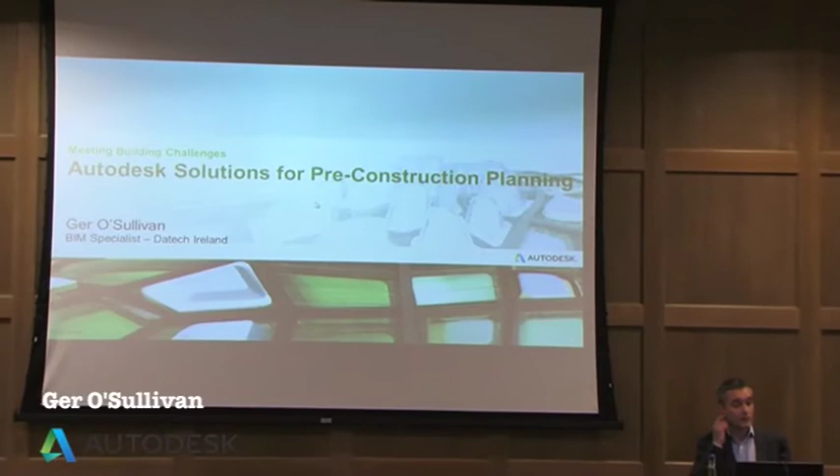So in keeping with the title of the event, we're going to have a look at some Autodesk solutions for pre-construction planning. I think you'll all agree that projects are getting more complex, and as we enter the BIM era, we now have access to more data than ever before. So what we're trying to think about is how we manage that data and use it to ensure we're successful in our project outcomes. I'm only going to concentrate on one product today, and that will be Autodesk Navisworks Manage.

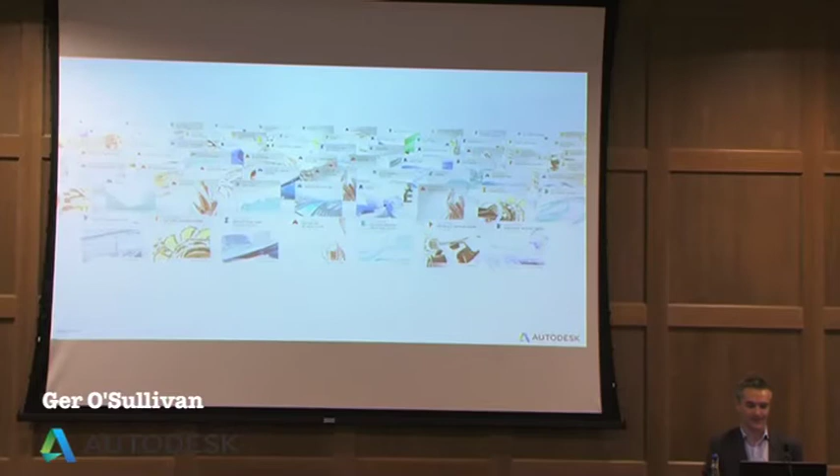So we've heard about interoperability, I was going to bring it up anyway, it was asked as a question. We've heard about our fantastic suite of products. This is just a selection, but we have plant, civil, obviously Revit for architecture, structure, and MEP, and we need these to talk to each other, to be able to collaborate. There's obviously a lot of third-party software out there too, and that's just the way the construction industry is.

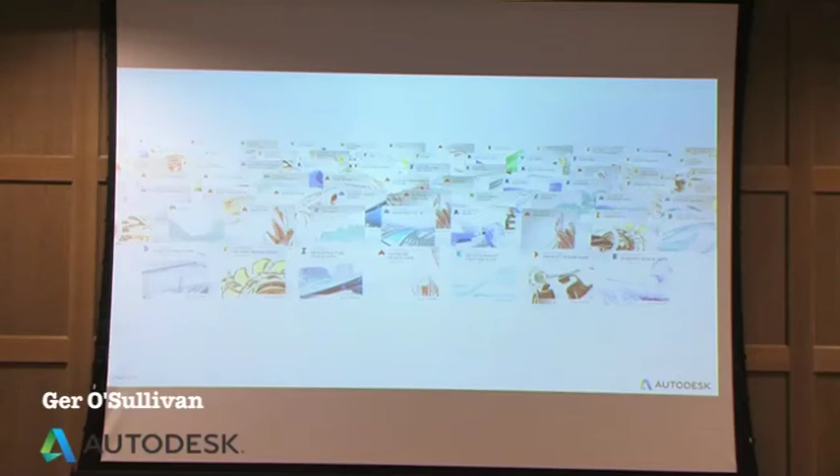So the challenge for any management tool is that it can start to aggregate and work with this information. I think that's the power of Navisworks, that it has more than 40 different design file formats it can use natively. On top of that we have IFC, which we've heard about as a collaboration format, and then we've got laser scans like point clouds, which has become very popular. The engine that manages those has improved by about 10 times in the last year, so that's a huge benefit.

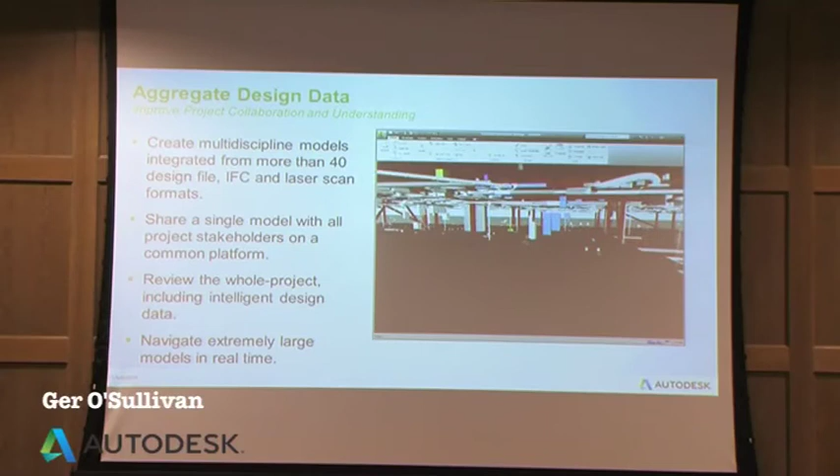So what you're seeing here while I'm talking is the video. We're basically aggregating all the file formats together into a single model, which can then be shared. We can share it via the desktop interface, the Manage software, or via a free viewer as well, so we can give that to all stakeholders.

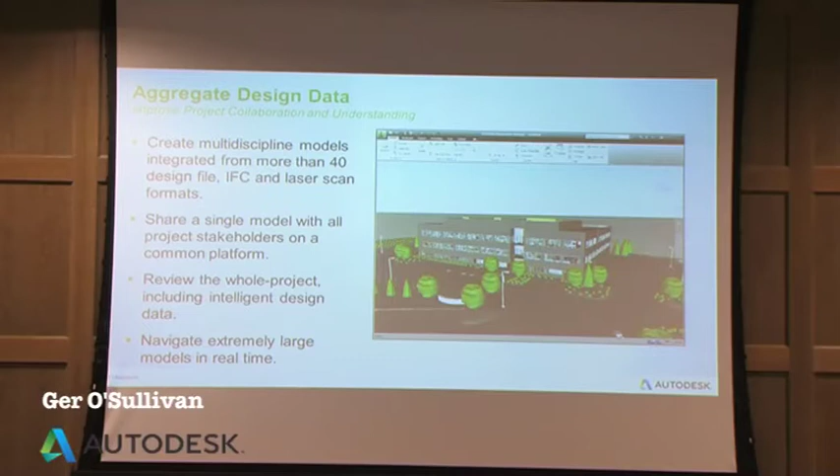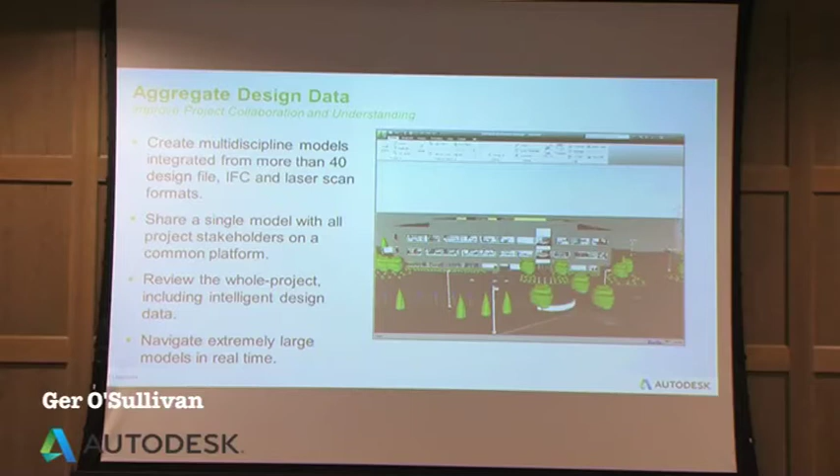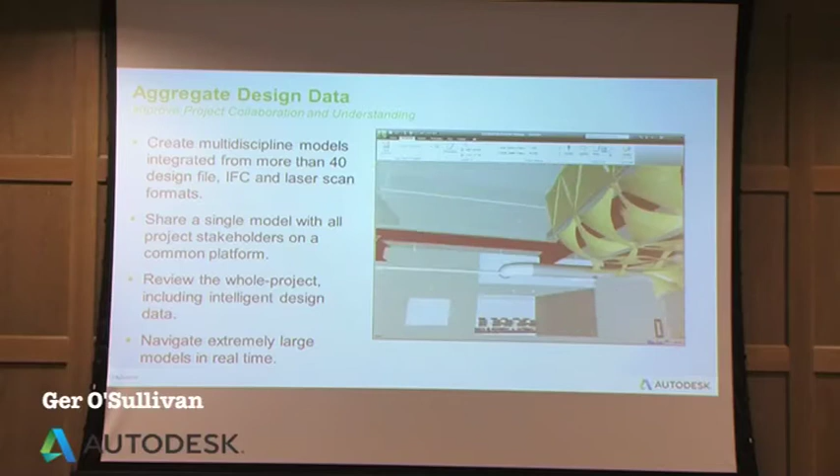It's quite good as well at navigating extremely large data sets. We talked about the amount of data we now have access to, so we obviously have an overhead there. Navisworks can cache the files, and then when it comes to navigating and reviewing in real time, it's a pretty streamlined process. Hopefully you just get a flavour of what it can do when it comes to getting in the information.

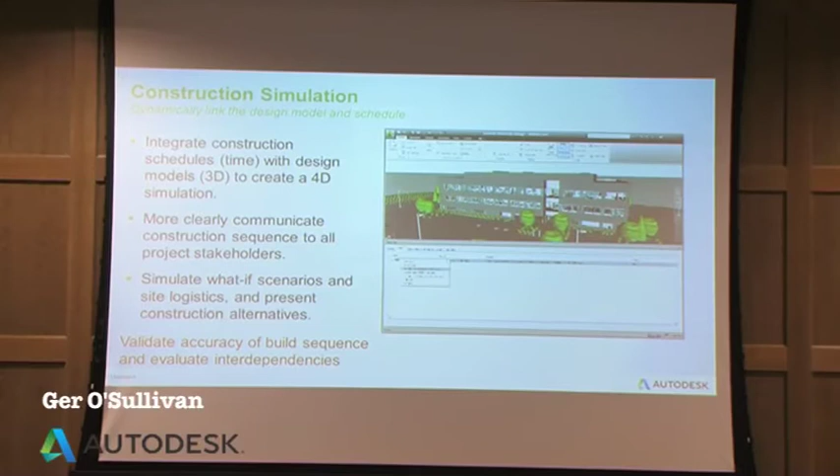We link in the actual CSV file, or it could be an MPP, and we get the same output within Navisworks itself. I know the video quality isn't brilliant, but hopefully you'll make out what the actual timeline is. We've got the actual start and end, and we can compare the two, so we can start to simulate what we're trying to achieve.

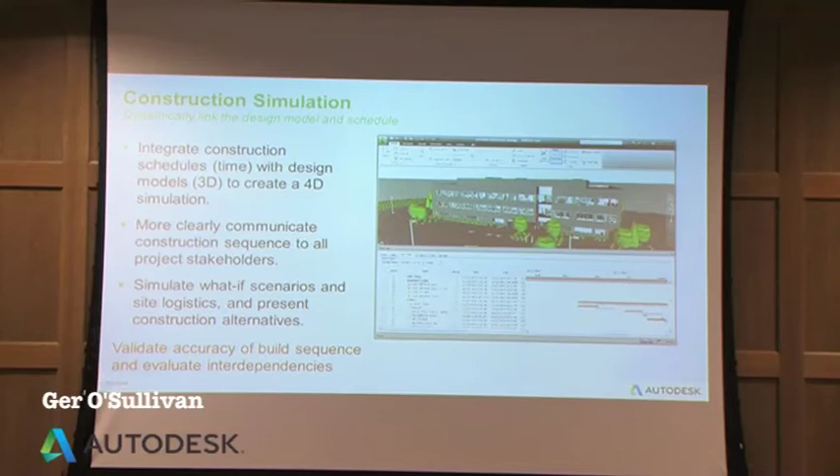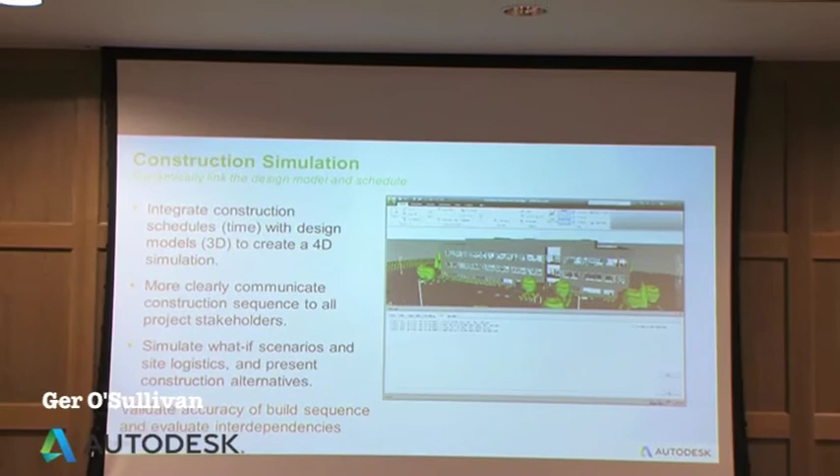There's also the option to play around with the dates inside Navis, so we can do what-if scenarios. We can then quickly add in some rules where we apply existing geometry to the actual timeline, and then simulate it. There's no animation going on in the background, we just begin to see the construction sequence via the dates. We can start to color code it, so if something is late we see it in a different color, or if on time we see it in the correct sequence. Hopefully that gives you a flavor of the power of the 4D sequencing.

But let's take it maybe just beyond the building, okay? We'll just fast forward onto the next video. This is again maybe slightly like the Laing O'Rourke video where they used it as a presentation tool. We might look at it as a presentation tool where we look at the whole site. We start to model the hoarding.

We start to model the site clearance - containers, site huts, stuff we normally don't put into the building model. It's still important to know what time it's going to be on site and where it'll be positioned. You can look at pouring of slabs, where trucks need to park, adding your crane in, where the boom goes, so we can see if it interferes with any neighbouring buildings. Adding clash detection into this is quite important too.

Maybe just modelling the scaffolding - we normally don't tend to do that, but it's important. Where do we store the scaffolding? How can we minimise the amount of scaffolding we need at any one time? Quite useful within the simulation.

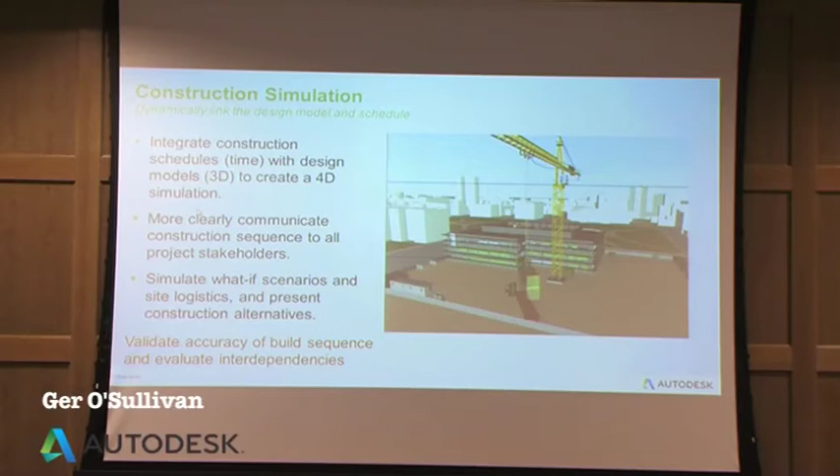And then just maybe equipment, bringing equipment on site. Where does the crane have to be? Where does the lorry have to park? And how do we lift it in so we don't clash with any of the other parts of the building? So that's a little bit extra.

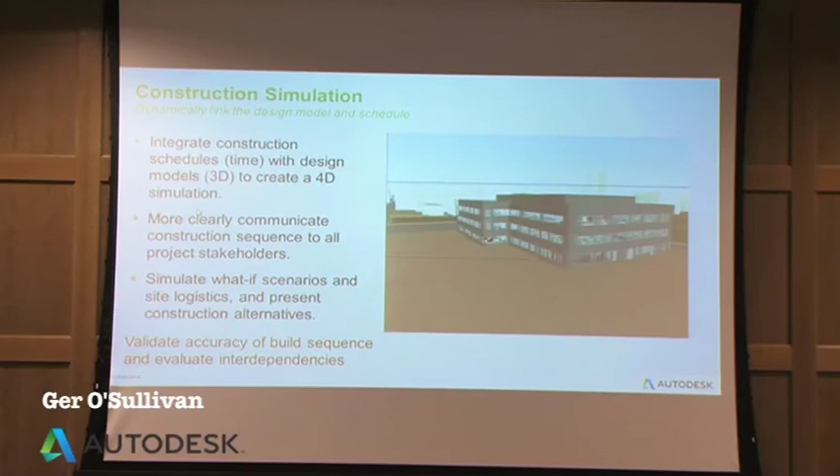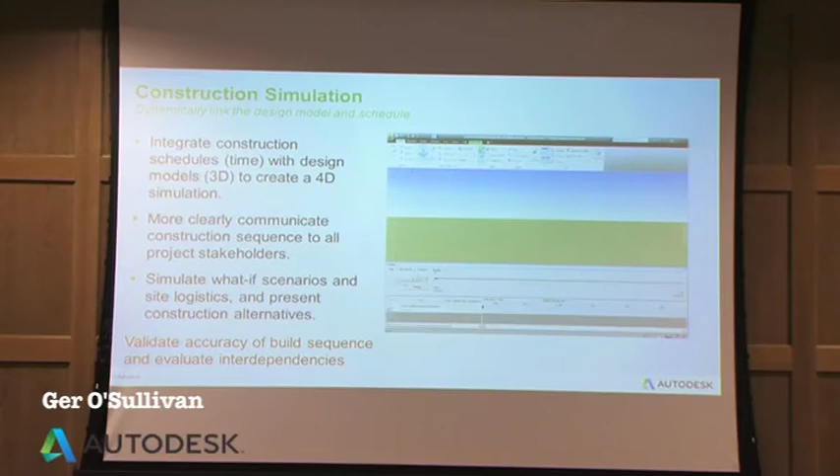If we take it a step further, you might use the simulation - we call it planning - to show how you construct a part of the building. So I've taken a wall panel and we get it to go, start it off. We've done something similar, actually using Revit to break up the wall using construction parts, and then I've added generic timelines, so we can show somebody on site how we put this part of the building together.

It's a very simple example - there's obviously more complex areas. But how does the cladding go on? Even the sequence - do we put in the windows before we put on the cladding? Maybe I should have, but we can decide and change that if it's a better way to construct it. When does the curtain walling pop in? When do we add glass in? What time does that have to be on site so we can get ready for it?

And then we can look at the interior. We can start to look at the plasterboard and how that gets sequenced. So again, beyond just the normal simulations, let's use it with a little bit more intelligence.

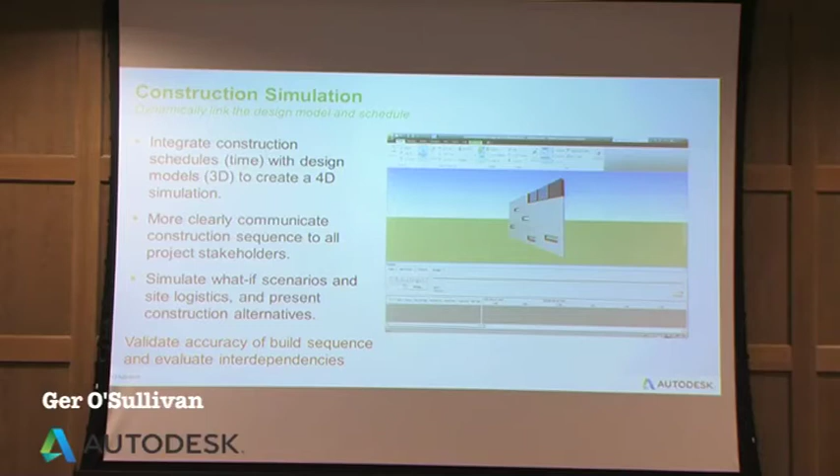Okay, let's have a quick look at clash detection then. See clash detection as planning what you're not going to do, as opposed to planning what you're going to do. So I'm not going to run that duct at 300 mil below the ceiling because there's a 400 mil beam just 20 meters down the road. Just think of it that way.

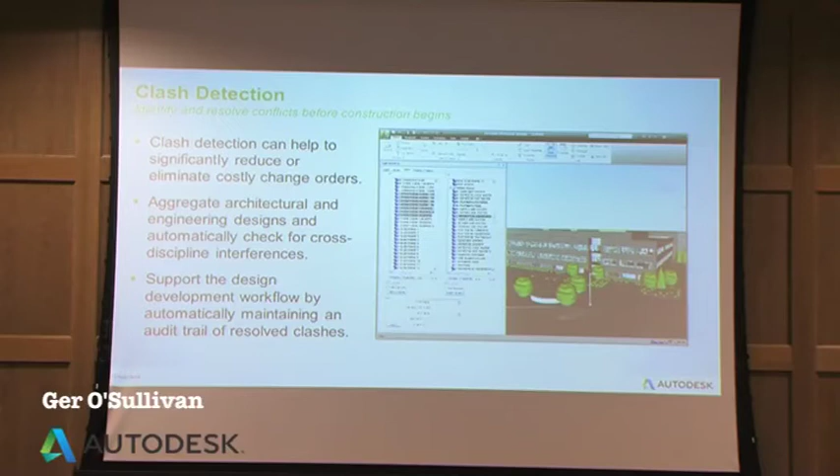In this case, you're seeing the clash happening. You're not seeing the background as to the grouping of the objects. We don't tend to clash everything - it creates a bit of a mess. We do it intelligently - we clash maybe first floor structure with first floor MEP, something like that.

We can then start to go through the clashes and add comments. Again, this is all about sharing the information down the line. We can review the clash so we can see it reviewed - there may be the same clash, but maybe it's clashing with another element in the building as well.

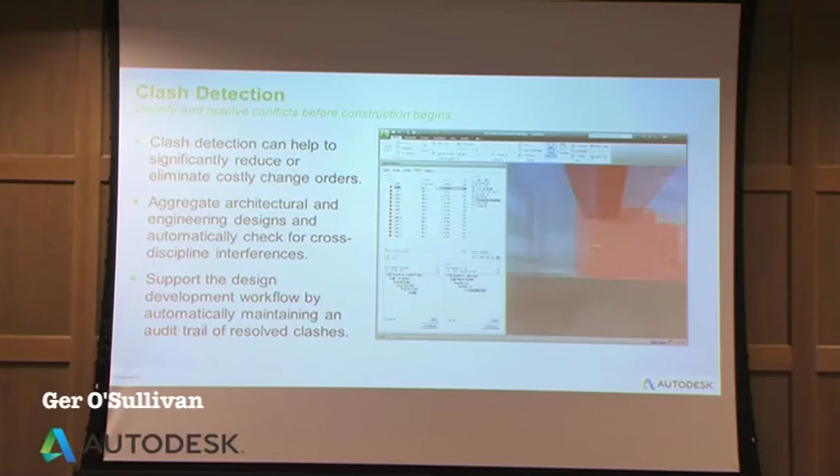In this case, I'm using transparent views, so we're not actually seeing the full extent - there's actually a problem with one of the walls as well. So in this case, the M&E loses out - I think that's probably normal. And we'll just add in some comments about moving the equipment.

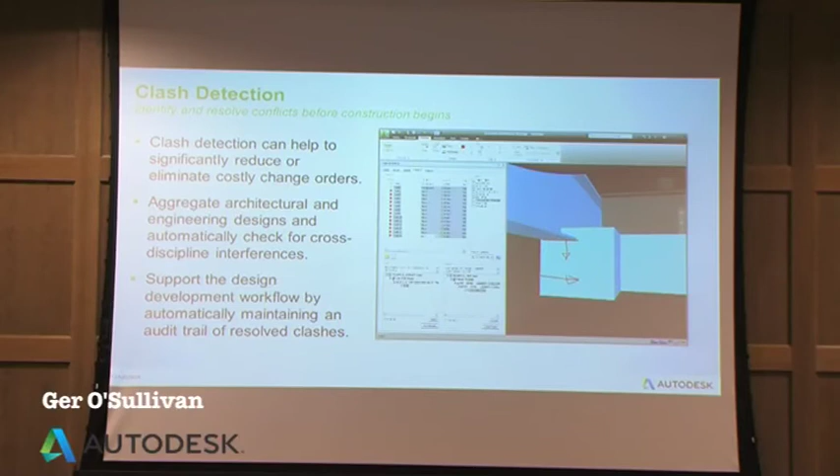Once these clashes have been gone through, I'll just review them all very quickly, adding in sketches to graphically show what needs to be done. We'll just review them all quickly. And there's obviously other options you have there, like approved and that.

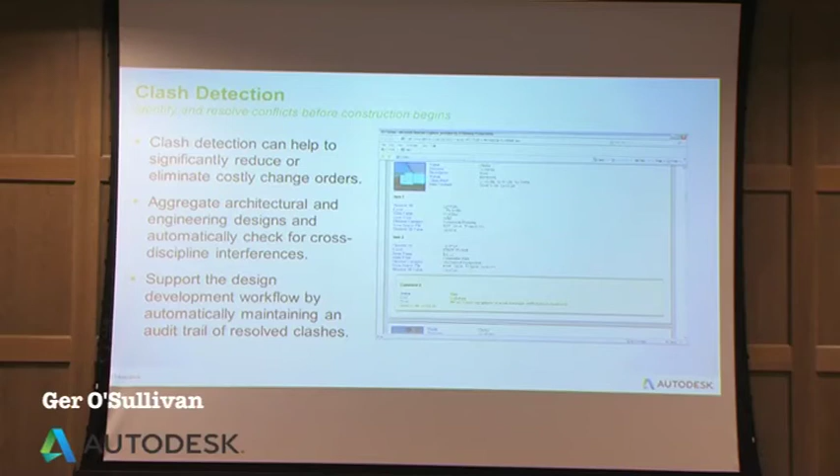We can then export out a report, and this report could be a HTML file, accessible to everybody. We'll get a quick preview of the clash, the comment associated with it, the location of the clash, what level it's on, what grid reference - very useful as an interface to see exactly what's going on. And then we go through the process.

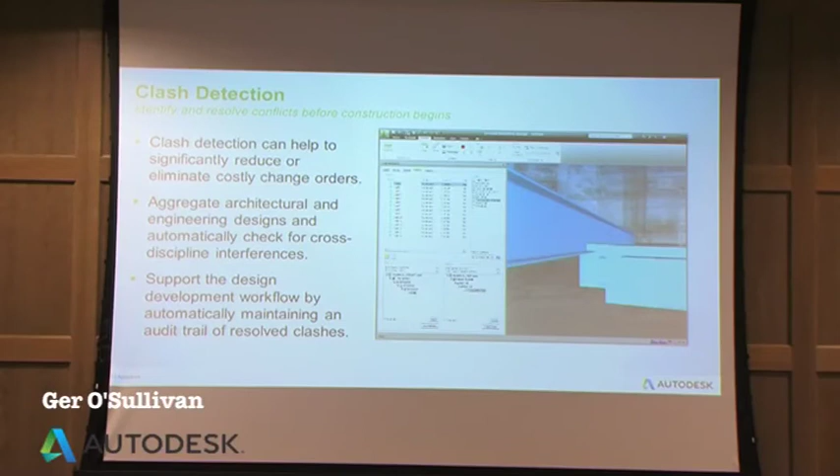So we talk about process - we have to fix it. Navisworks isn't the tool we fix it in.

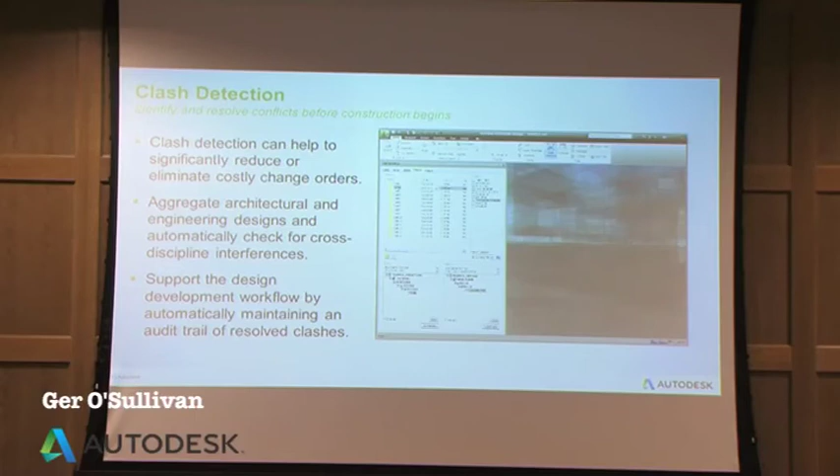We go back to the native application, make the fix, and reload it in. That's what's happening here in the background - reloading in the MEP, overwriting the existing NWC file, and updating the NWF. Lots of file formats, but we can talk about them later. So again, all the clashes are seen as old to start with. We'll update the batch, and they've all been resolved. So I have fixed them.

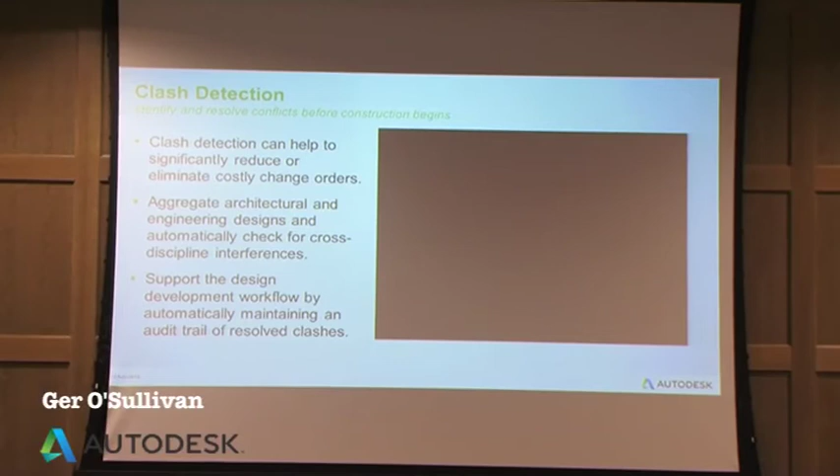Again, what it says on the screen is about aggregating, about supporting the workflow, and maintaining an audit trail. These HTML files can be saved as an audit trail of all clashes.

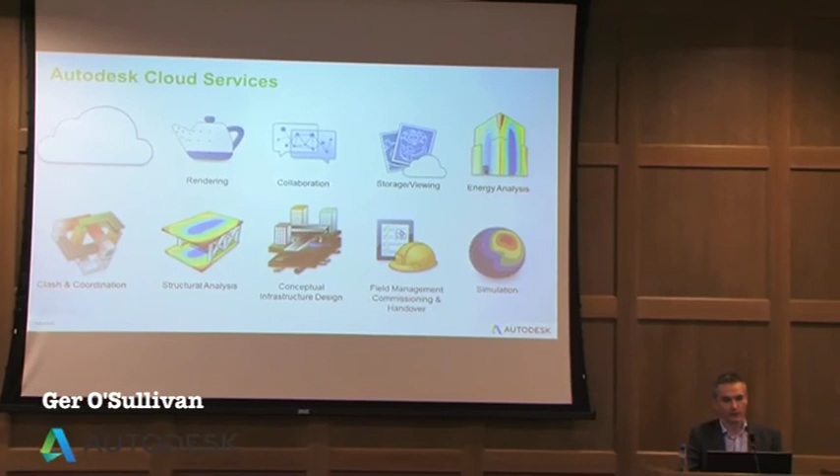Okay, let's move on to a couple of other things. Autodesk, we talk a lot about the cloud - we're starting to provide lots of services there, like rendering, energy analysis, structure analysis. So in keeping with the theme, we'll look at clash and coordination in the cloud.

This is through a product called Autodesk BIM 360 Glue. It isn't available yet, but it will be towards the end of the year through the reseller channel. This is just a sneak preview - a lot of you have probably Googled it already.

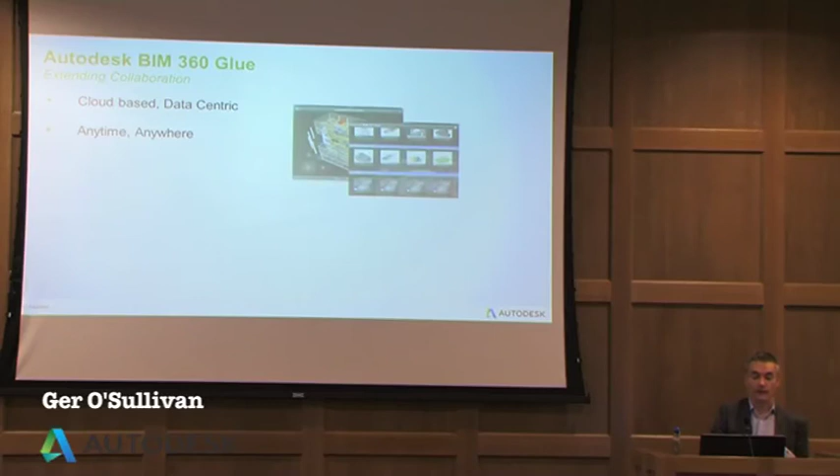So it's about extending collaboration. What do I mean by extending? It's cloud-based - when we look at Navisworks, it's desktop-based. We can share files via Buzzsaw, via Vault, via Dropbox, but the files themselves hold the data. In this case, that data is up in the cloud, meaning you have access to it anywhere, anytime.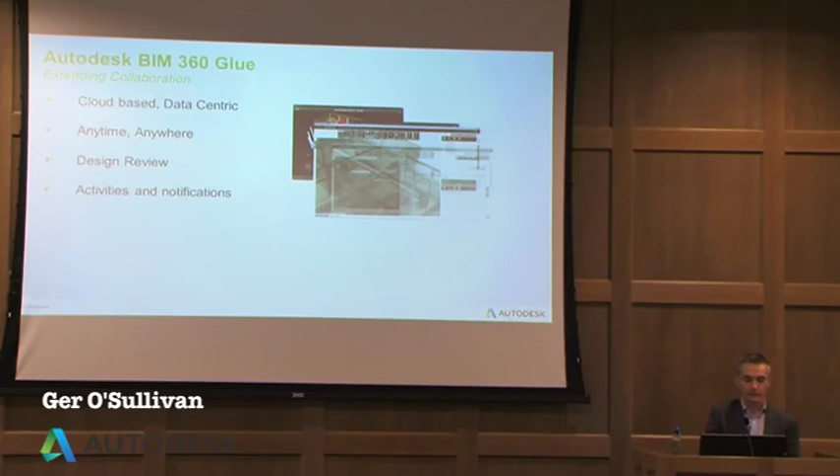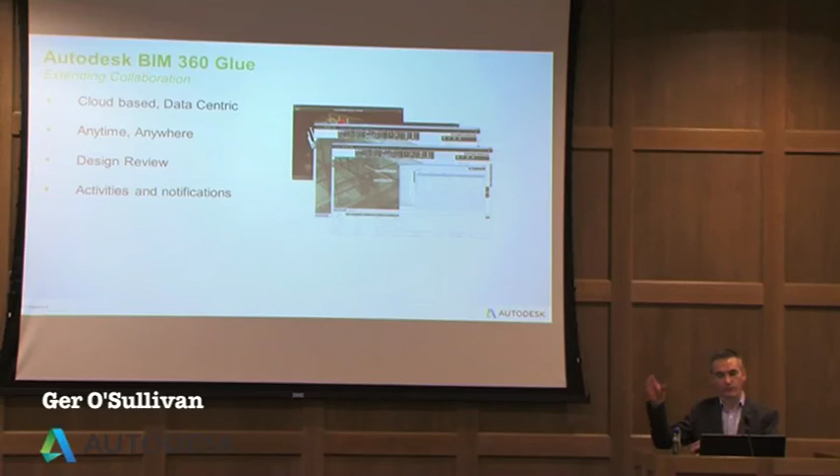We can still do design review like in Navis - add comments, select objects, get information from those objects. It adds a bit extra because activities are monitored, so anybody who goes into the model and makes a comment has their user information attached and logged. We get notifications, and we can also link it into Clash. There's also a mobile app, which I'll show later or you can download yourself. So there's a lot more interaction with the model, and it links into your email system - kind of one-click BIM. Click on the object, email the comments back, and you get them on your email system.

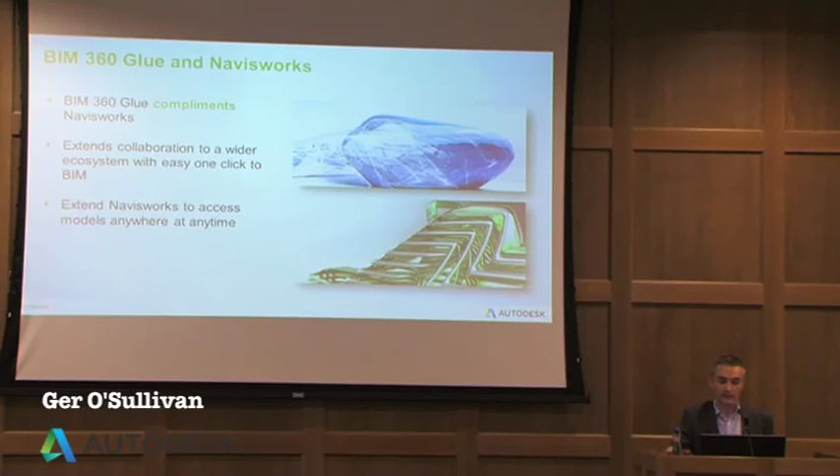So how does it work with Navis - do they do the same thing? I suppose in this case it complements Navisworks. It extends the collaboration to the cloud, extends it to all the other stakeholders, giving access anywhere, anytime.

So for a quick overview, the options available are you can glue from Navis Manage or Simulate to the cloud. This means if you go back to the first slide where we talked about 40 file formats, laser scans, IFC - any of that information can be glued to the cloud, so you can put all that information up there. You can also open information you've glued from the cloud in Navisworks, so Navis gives you the simulation you've seen, the 4D.

This year we also have quantification in there, and there's a really good rendering engine in Navis, plus animation - all that crane animation and moving parts is part of Navis. So really they're a good fit together, and that's what we're promoting.

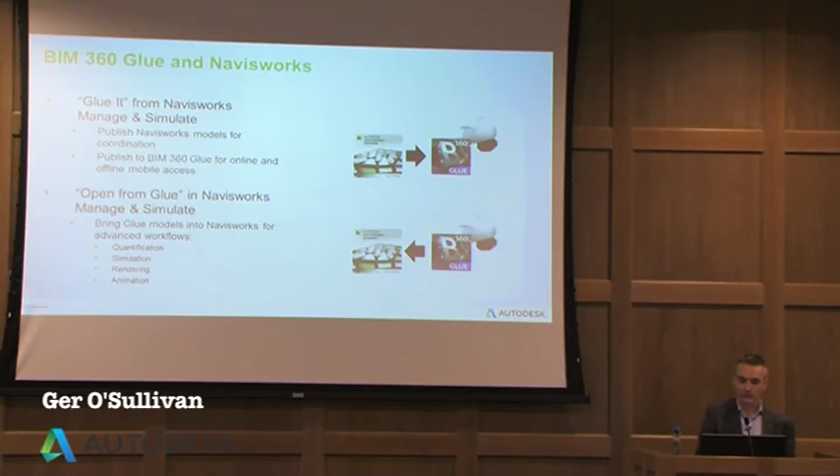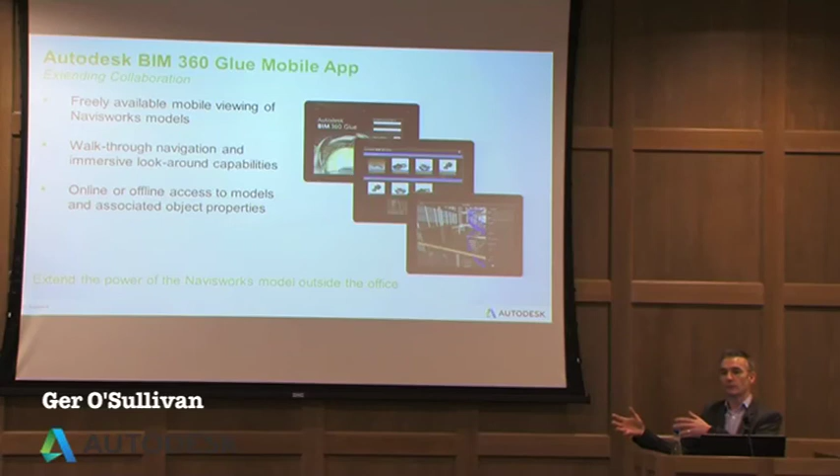Have a look at the mobile app, download it from iTunes - it's free. You have 2 projects up there, Imperial and Metric. You can walk around it, have a play with the immersive view. It's really cool, kind of getting towards augmented reality where you could be in the room holding an iPad, moving around and seeing the model and what's constructed. We're not there yet, but that's where it's going.

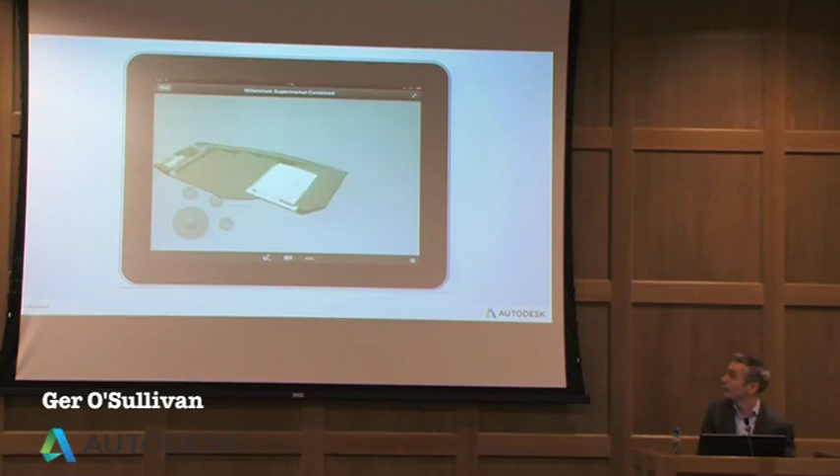That was a quick overview - I won't show it live because of time, but that's the iPad interface and you playing around with it. We could do it over there, but that's pretty much how it works. It's quite cool. That's the trial, if anybody wants to download it.